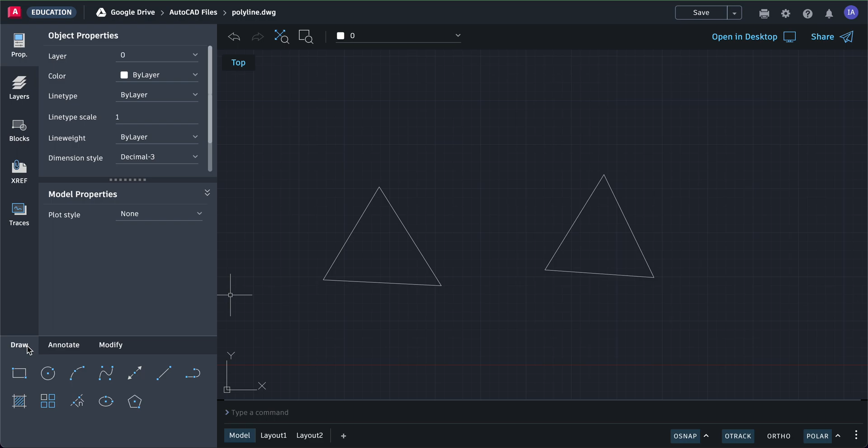Okay, so in our last video we were discussing the difference between drawing a line from a polyline. This four-sided object is made out of lines, and then if I wanted to use a polyline, a P-line, I can also draw the same object.

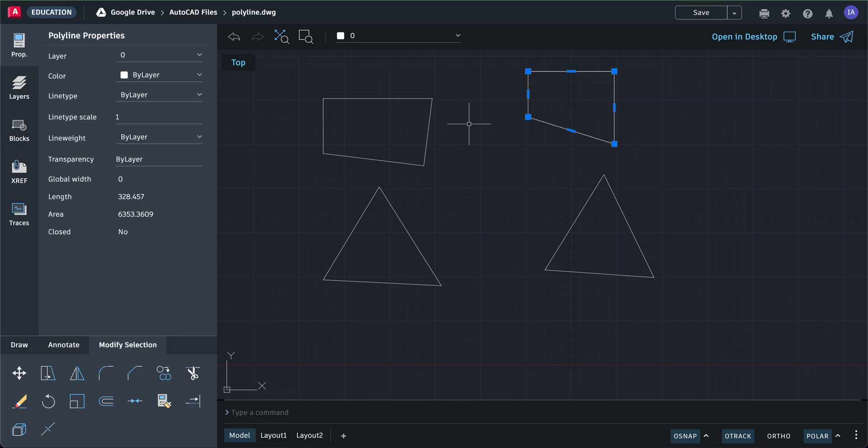If you remember, the difference is objects made by lines are separate lines: 1, 2, 3, 4. But objects made by polylines are going to be just one object. Okay, all right.

Now we can always change how corners of closed objects look. Under Modify, you have the fillet command. If you click fillet, you can define the radius. Let's say 1, press enter. If I now select two lines, fillet, and then the radius is 1, enter.

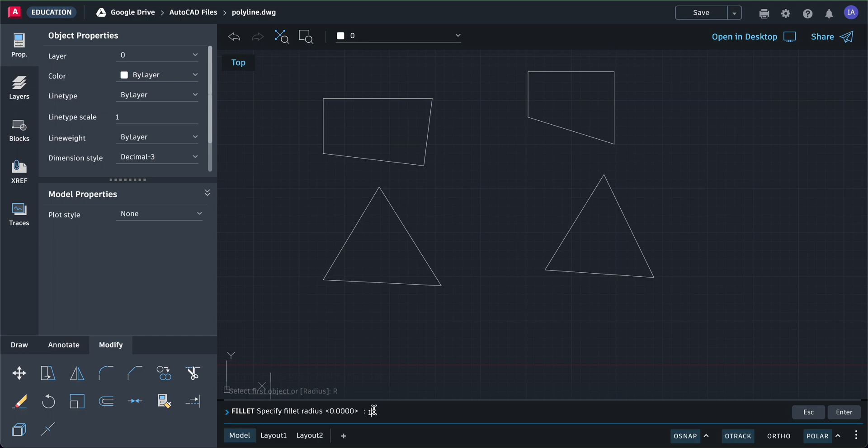If I select the two lines of a polyline, it will round that corner. See, it's now rounded. Now the radius is too small, so let's try a bigger radius, let's say 50.

Enter, and if I click now one side and one adjacent side, it should give us a bigger radius. Did it bigger the radius? Let's do it again: fillet, radius 50, press enter, and then I select one line and another line, then zoom extents, and there's the rounded corner.

It's too big, huh? 1 was this one here, that's 1, and 50 is this round. So let's say I want to do a 20 rounded corner here. I just do fillet, click radius, type 20, press enter, and then select the two lines that make a corner.

Now what happens if I do it here? Well, let's look. Click fillet, click radius, let's make a radius of 10, press enter, and then select one object and select the other object. You do the same thing.

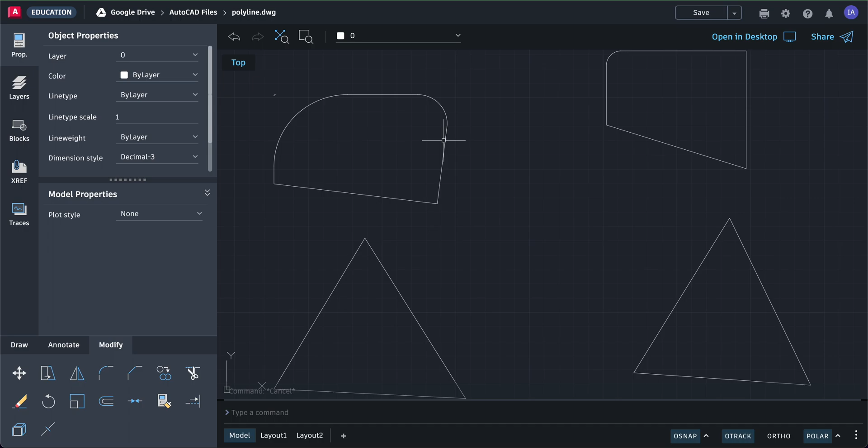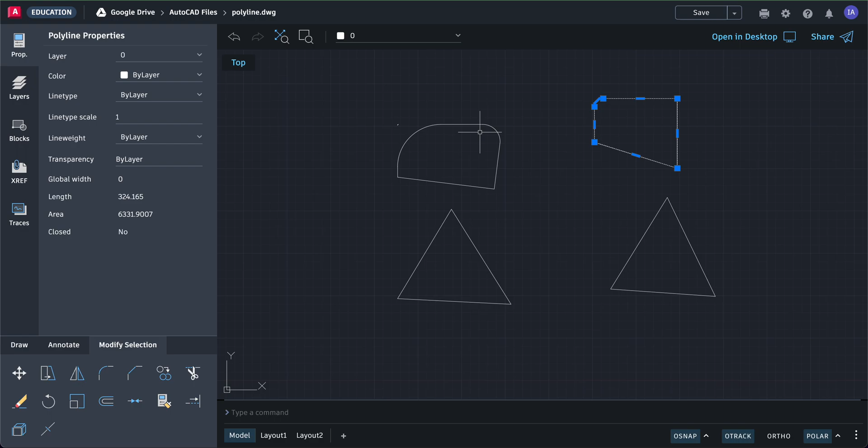But the difference is, if I press escape, these are separate objects, even the arc now is separate. But over here, when I click on it, it's still one object. Because whenever you do a rounded corner using the fillet command, it is a separate object if you are clicking two lines, but if you are selecting parts of a polyline, that rounded corner will be part of the polyline. Alright, so that's lesson today.

Why don't you follow that one? Create two shapes, one from the line, one from polyline, and then let's practice doing a fillet and adjusting the radius. Okay?